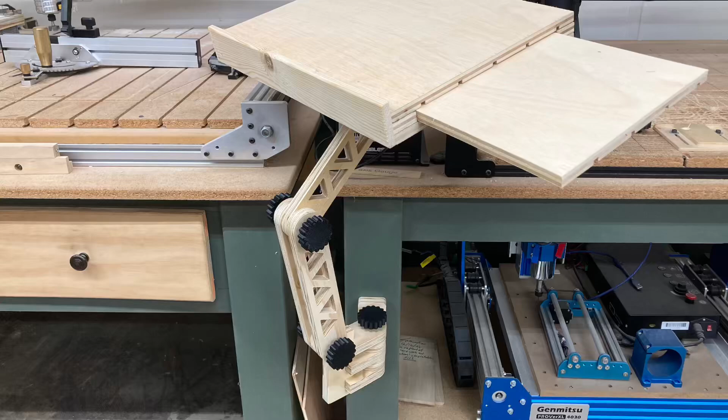A great addition to the shop, cut out using the Easel software on the X-Carve CNC machine. 3D printed all of the different knobs necessary for it, and quick and easy assembly of this computer stand on my CNC table.

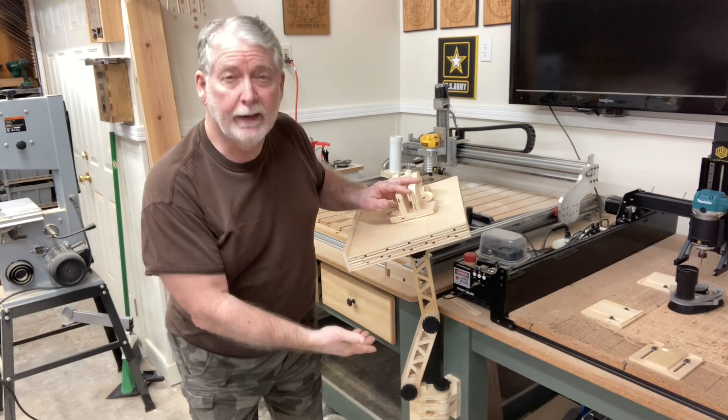Recently I just finished making a video showing exactly how to make this computer stand. I asked you guys to leave a comment if you would like to see the details on how I designed these various components in Easel to make this whole thing work. There were a number of different components that needed to be made, like this one and this one. People were saying yes, they wanted to know exactly how to design something like this in Easel.

There are some basic elements you need to understand. In Easel, there's not really a tape measure you can use to measure out the different sizes, but you can measure the actual size of the object, and you can position it exactly where you want using a coordinate system built into the software. That's what we're going to use to design these different components. Once you understand how that system works, everything else will fall into place.

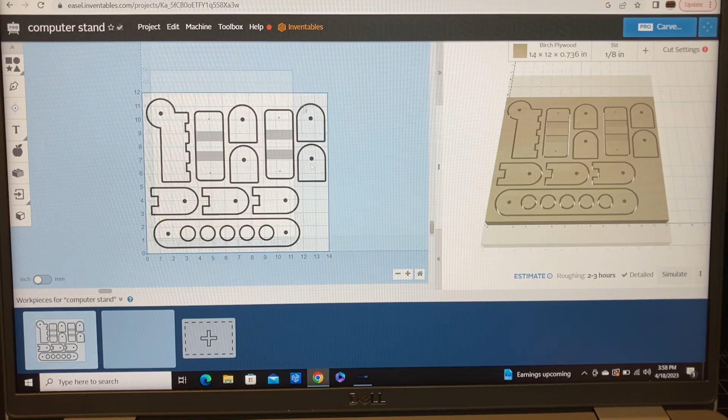What I want to start with is just a very simple basic component right here. We're going to start off with a brand new workpiece, and I'm going to come up to the Shapes menu and bring in this right here. Now this in the original drawing was 2 inches by 4 inches, and I've got a couple of ways I can do this. I can come over here, because currently this is at 2 inches by 2 inches.

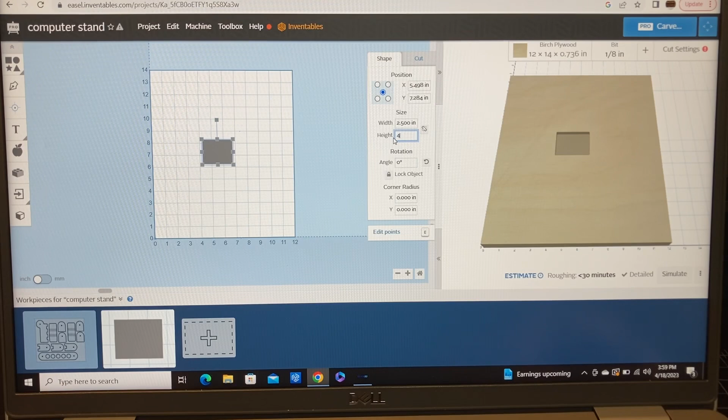I want to change this. I want to beef up this project a little bit, and I want to make it 2.5 inches wide, and make it 4 inches long. And there is the actual square.

Now the next thing I want to do is bring in a circle. So we'll do the same thing - open up the Shapes menu and bring in that circle. Now because I had set this at 2.5 inches, I want to set this circle at the same size. I'm going to come over here and lock this so that the diameter of this circle will remain the same. So now I have a circle that is 2.5 inches.

Now here is the important part. I want to be able to take this and position it exactly on top of this, where it's not hanging over to one side or the other. The easiest way to do that is to actually use the grid system.

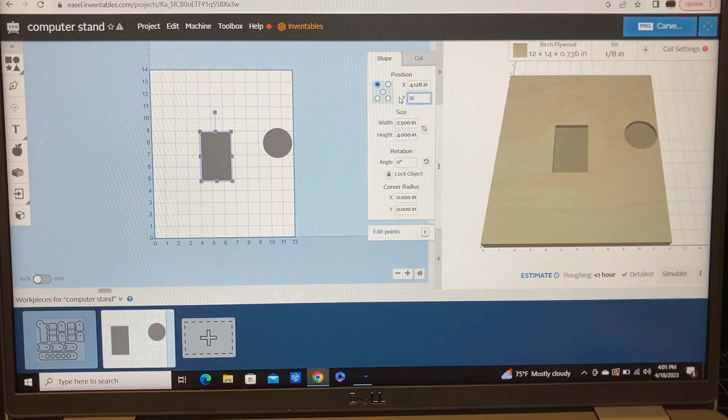To use this grid system, I'm going to highlight this to begin with, and right here on the 9-inch line, I want to put this right on the 9-inch line. You can see right now it's at 8.887 - I'm going to switch that and put it at 9.0. Now as far as this circle, I'm going to do the same exact thing, but in this case it's going to be using the center.

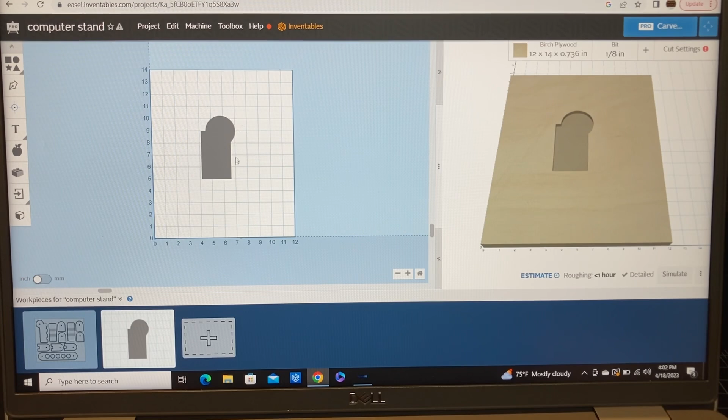If I use the center and put this on the y-axis at 9.0, it will drop down on the y-axis, exactly on that halfway point, but not on the left and right position. Now that I have this right at 9 inches, I can click on both components and move this over with the alignment tool, and that aligns it perfectly in line.

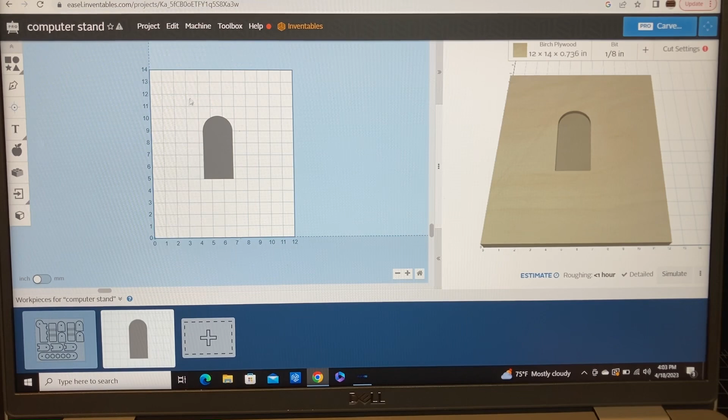Now that I have these completely joined together, let's combine them into one item. By clicking this right there, now this is one component. Click on this now and I can move it anywhere I want, and it will be as one item.

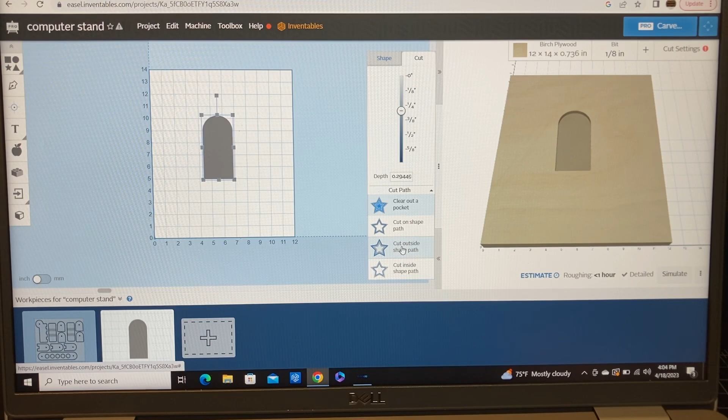Now the next step is to also put this where it's cutting on the outside. So by selecting the cut menu, come down to the cut path, and I can see the different options, and I want this to cut on the outside. I want to use this coordinate system again to my advantage.

So I want to come back to the shape menu and position this now on the x-axis. I'm going to put this, let's say, at the 6-inch mark on the x-axis, and all that does is slide it over. It's still centered on this point at my 9 inches.

We're going to select my circle, take this right up here, lock this, and put this at 0.315. There's my circle, and I want to position this now where? I want to position it directly on the 6 for my x-axis, and exactly on the 9-inch mark on the y-axis.

Now that component is finished. I can zoom in, and you can see that hole is going to be directly into that centered point, exactly where it needs to be. It's all one continuous piece.

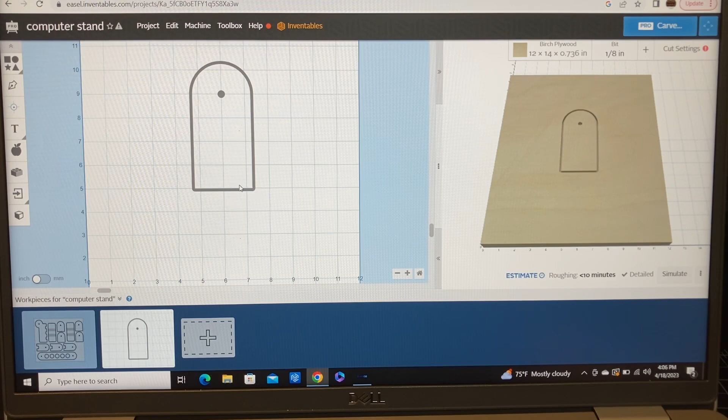If I want to set this up now to be able to cut all the way through, I'm going to highlight both of these, go over to the cut settings, and I'll be able to change this and bring it all the way down to cut full depth.

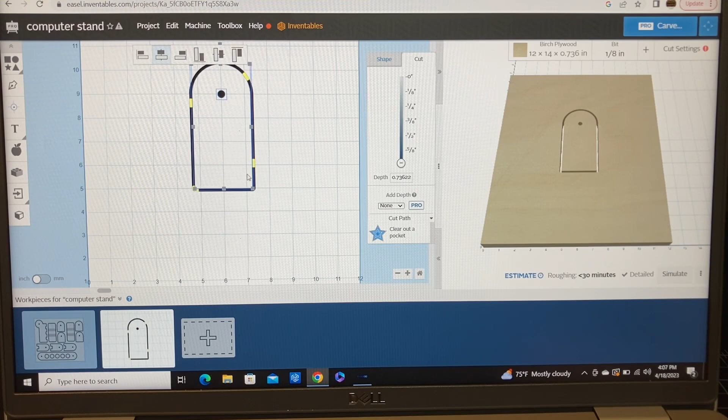Now you need to decide if you want to use the tabs or not. If you want to use the tabs, you can always move these tabs, like this one right here in the corner. I certainly would not want that in the corner, so we could move that over. You could bring this tab over by just getting it right there on that point, holding down the left mouse key, bringing it down. Same thing, hold down the mouse key, you can slide it up to where you want.

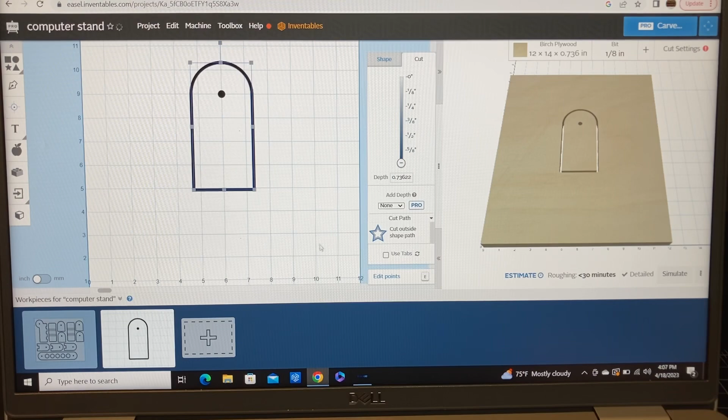Now, as many of you know, I typically do not use the tabs. So in that case, I would come right over here to this section where it says Use Tabs, and I would unclick that, and the tabs would be gone. You see what the finished product is going to look like over here. Now, that's the basics on how to put together a very basic shape.

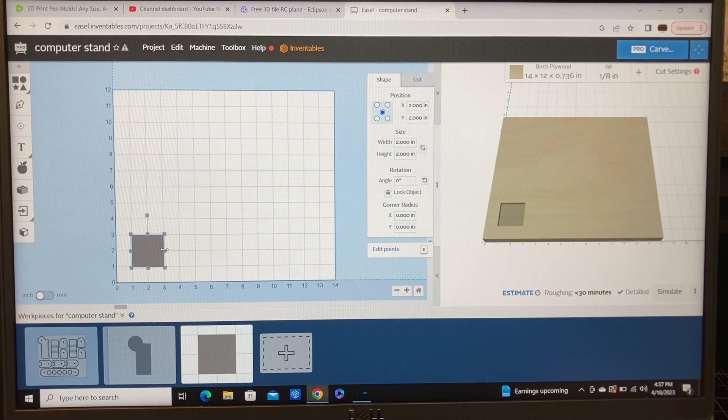With this knowledge now, I want to be able to make the arm for this. So we're coming back up to the shape menu, and we'll select the square, and we can just drag this out. Now, how big does this need to be? Well, in the original design, this was actually 7 inches, so we're going to start with that. We'll make this 7 inches, and we're going to increase this to 2.5 inches.

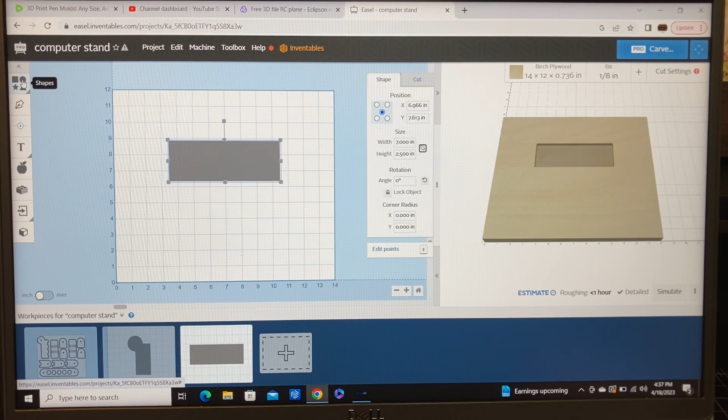Now, at this point, it's time to put the circles on the end of this. So let's grab the shapes menu, bring the circle in. We'll change the circle by locking this, making this 2.5 inches.

So we have that component, and we need to be able to duplicate it. I could just bring in another one, or I can hit Control C and Control V, and that will give me my second one. So there's the basic components that I need to make my arm.

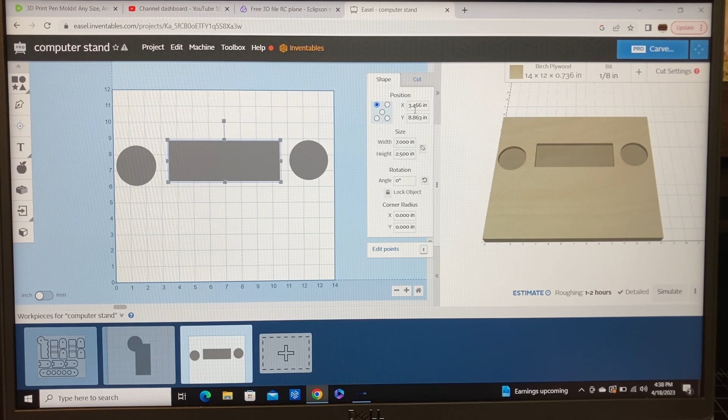Let's move this over and put this on this side, closest to the 3 on the x-axis. Now that I have this on the x-axis at the 3, let's take my circle and do the same thing. I'll center this using the center of my point, and put this on the x-axis at the 3 inches. And there it is.

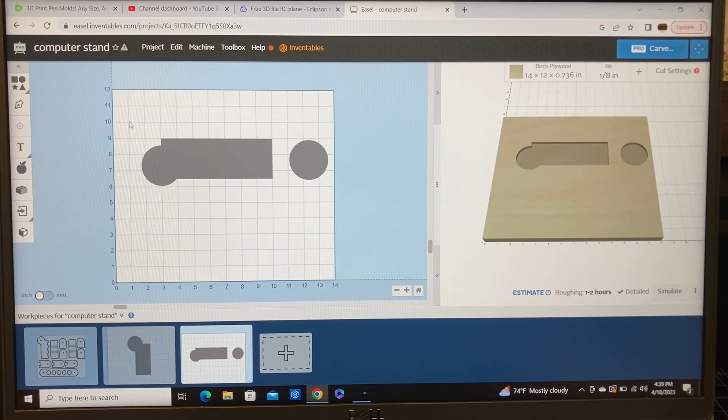Now I'm going to highlight both of these and come up to the alignment tool, and that takes care of it. Now let's do the exact same thing on the other end. So that is the component that I need.

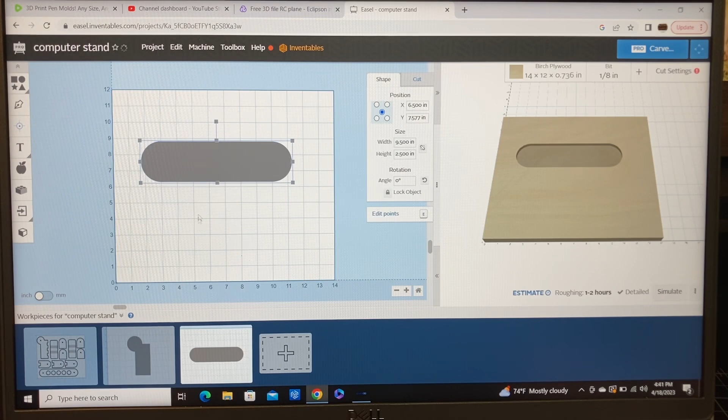At this point, let's go ahead and combine it. Edit menu, combine, there we go. We're going to cut it out on the outside, and we'll select that, and there is our component.

Next, we want to put in the 2 holes on each end, and those holes were 0.315. So back to the shapes menu, select a circle, and change the size. Remember, this was 0.315, for the 5/16 inch bolt. Your bolt size may vary, so keep that in mind if you need to adjust these sizes. But for my purposes, 0.315 is perfect, and I can slide this into position. Using this coordinate system, I can position this very precisely exactly where it needs to be.

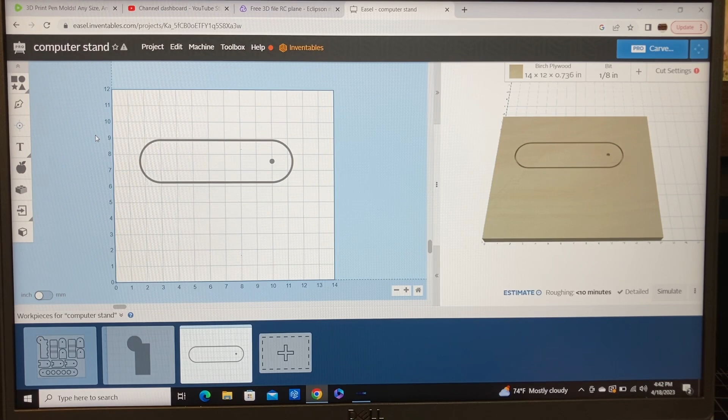I'll repeat the same exact process for the hole at the other end of this computer arm. This completes the computer arm, so this component is done. I can highlight everything and slide it right down to the bottom.

The next part is up to you. If you want to put circles or triangles in the center of this arm, you can certainly do that using the exact same process that we have shown so far in this video.

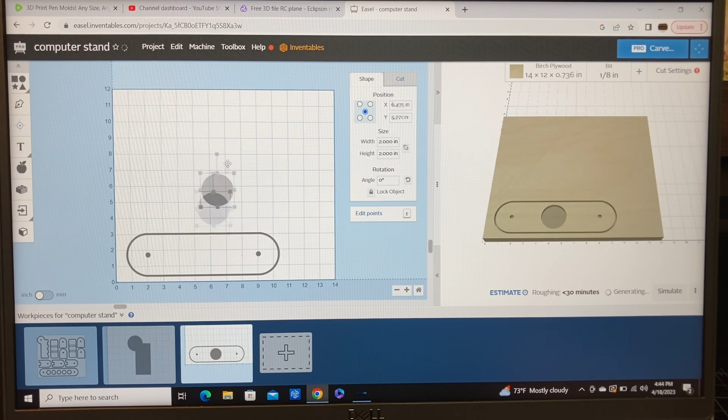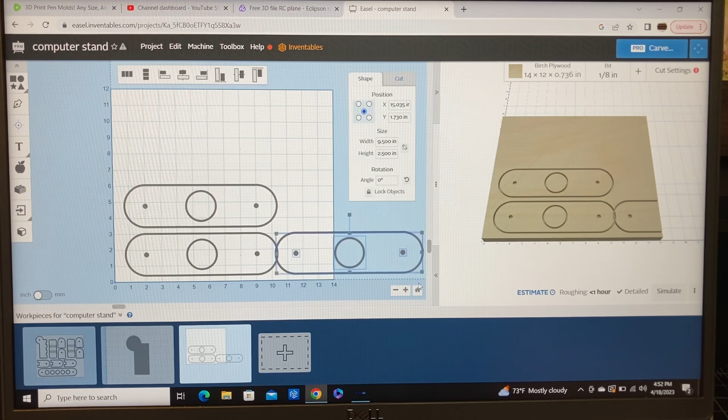You'll need at least 3 computer arms to be able to make this computer stand. At this point, I'm going to highlight it and use Control-C and Control-V to duplicate this. And of course, I'll need to do this one more time, so I hit Control-V once more. From here, I'll highlight it and slide it over, aligning it where I want to place it on my project board. I'll do the same thing with this third piece, highlight it, and move it into position as well.

I want to give you some bonus information. I decided to make this arm a little bit larger, and by highlighting this, I can slide this to the right. It does not affect anything else to the left; it only moves it to the right in that direction. This portion is exactly the same.

The only thing that needs to move is the hole. I need to position it back over in the same position as it was originally, and the center circle would need to be placed again in the center. But using the exact same process as before, using the coordinate system, this becomes a very simple process because we're only moving this on the x-axis. The y-axis is already fixed and did not change.

I hope that you're beginning to see that you can very effectively use this coordinate system to make very accurate measurements and placement of the various items to create these components.

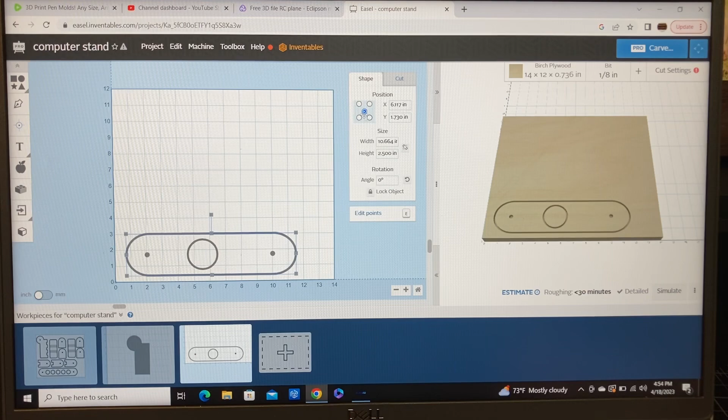To name this workpiece, I can select it in the top right hand corner. You'll have this little drop down menu, select rename. That brings up this window, and you can type in, for example, computer arm, and that will be the new name. Hit rename, and there you go. Now you see computer arm in the bottom left hand corner of the workpiece.

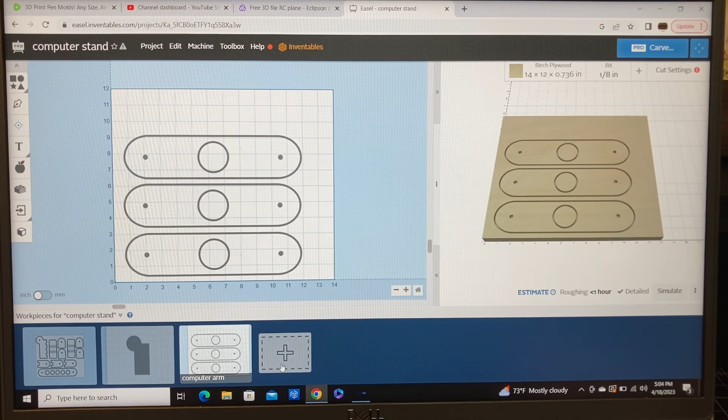Now I want to open up a brand new workpiece, and I want to start working on the base. So it's back to the shapes menu, and let's pull out the square, and we'll put this up into the center so we can work with it. The basic shape of this is 2.5 inches on the width and 5 inches on the height.

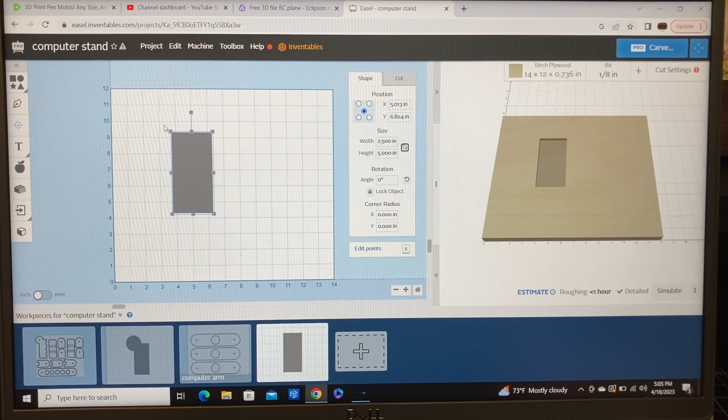I also want to show you how to eliminate the sharp edges on these corners by using the corner radius. I can just highlight one, put in 0.25 of an inch, and hit enter, and that rounds off the edges on all 4 of the corners.

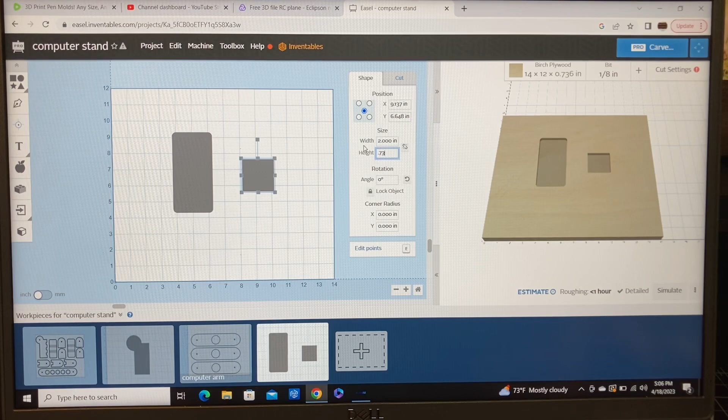Now I want to add the 2 slots. These are the registration marks for the plywood to fit into, giving the correct distance between the 2 pieces of plywood. My plywood is 0.736 of an inch, and I want to increase that by about 0.040 to give a little tolerance. So I'll enter in 0.776. You'll need to verify the thickness of your plywood and enter the correct amount.

I'm also going to enter the depth of the cut by selecting the cut menu, and I'll set this either with the slide bar or key in the amount. I'm going to put in 0.15 of an inch for the depth, and that will give me a nice slot for the plywood to fit into.

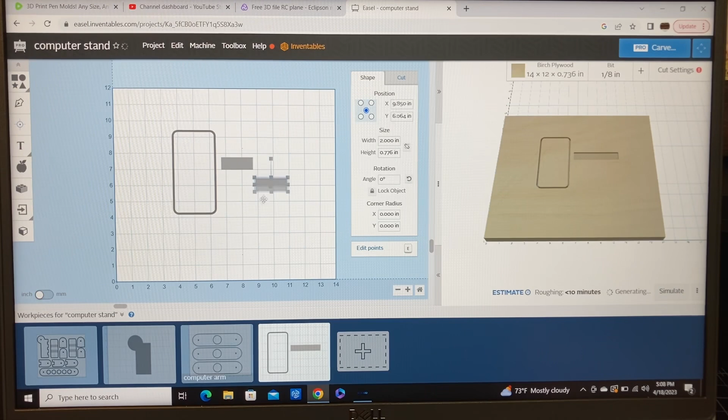Now with this base, let's go ahead and change this where it's cutting on the outside. So there's that shape, and we know we're going to need 2 of these. They're going to need to be one right there. We'll hit Control-C and Control-V, and we'll have another one. We know it's going to be right here.

This bracket will need to be able to sit inside of there, and we need to have that space for that plywood right through here. So where is it actually going to be? Well, the simplest way is to use the grid. I want to set this grid up where I'm working with the center points to begin with and work outward. So this is centered on the y-axis.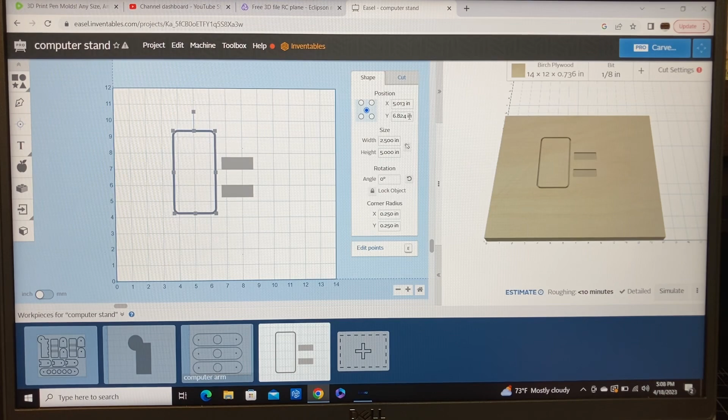We'll just make this at 7 inches. So that's going to be the center point. I'm not worried about the x-axis. I want this also cutting all the way through, so that will cut all the way down. I'm going to have no tabs in there. Now over here on the preview window, you can see where it's cutting all the way through.

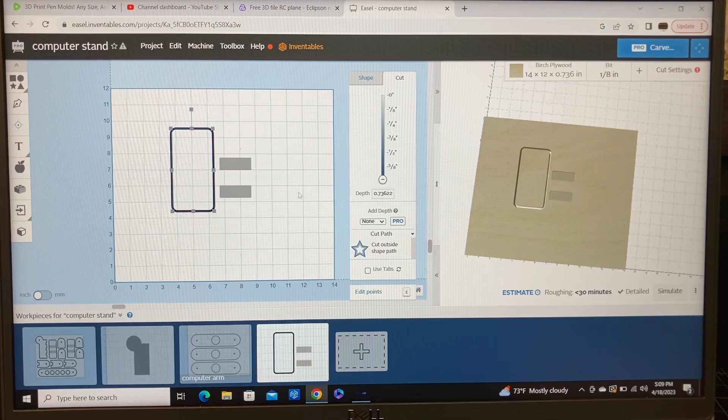Now for these, if I just put these in here, that's not going to fit. That's going to need to be extended a little bit to fit into that space. But look what happens when I do that - you can see how it's not cutting all the way through.

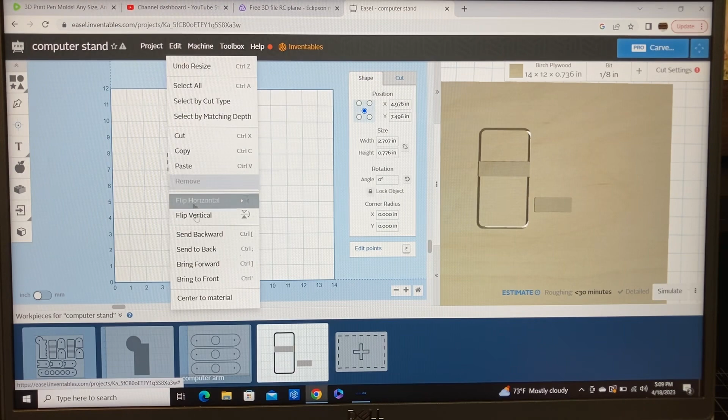Well, there's a simple solution. All I need to do is come up here to the edit menu and select send to the back. And when I send it to the back, you're going to see where that is now going to cut all the way through. Perfect, exactly what you want. Now that takes care of my x-axis. That's exactly where I need to have it, but it does not take into account the y-axis.

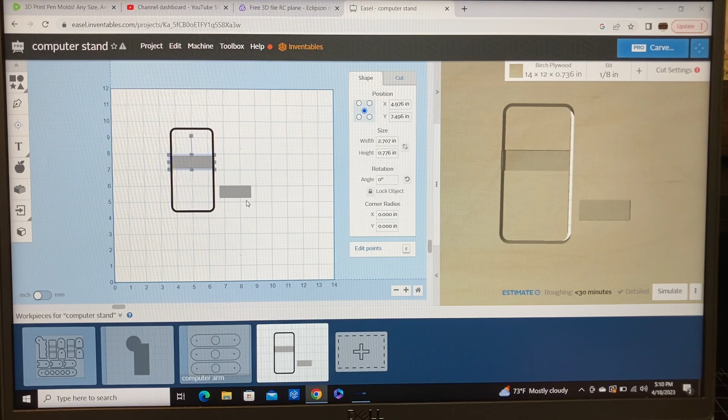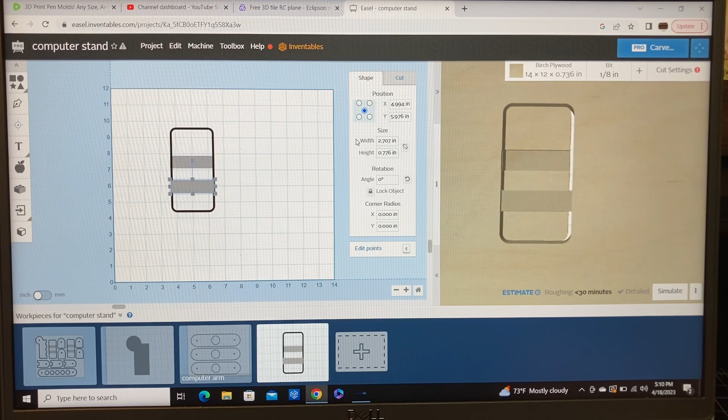The other thing is, this gives me the exact size that I need. I know this was 2.707. Let's make this one 2.707, and that would be fine. We'll slide that over, and we can put that in at exactly the same point. Where's the center point? The center point of this is my 5 inches on the x-axis. You see the same problem that we have over here. All we need to do is highlight it and send it to the back.

Now we need to work on the y-axis. How thick was that plywood with the tolerance built in? Well, it was 0.776. What is half of that? Half of that would be 0.388. Now using the 0.388, that is going to be real important because we know the center point is our 7 inches.

So if you have 7 inches, let's highlight this right there. Let's make this highlighted on the bottom. And this now needs to be at 7.338. That moves it up exactly half of the thickness of the plywood.

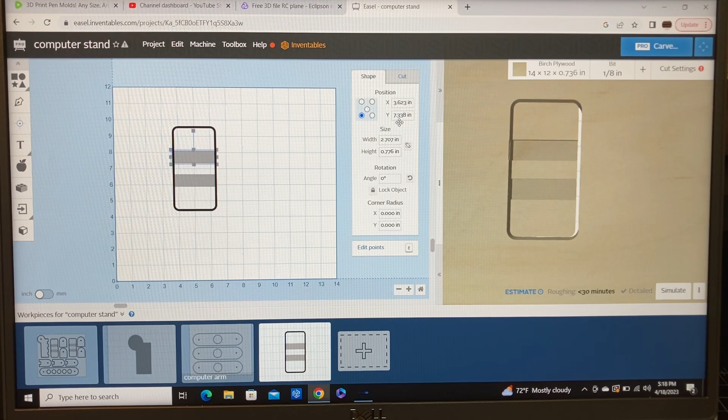Let's get my bottom slot moved. Right now I'm at 7.338, and we're going to subtract 0.776, and that gives me 6.562.

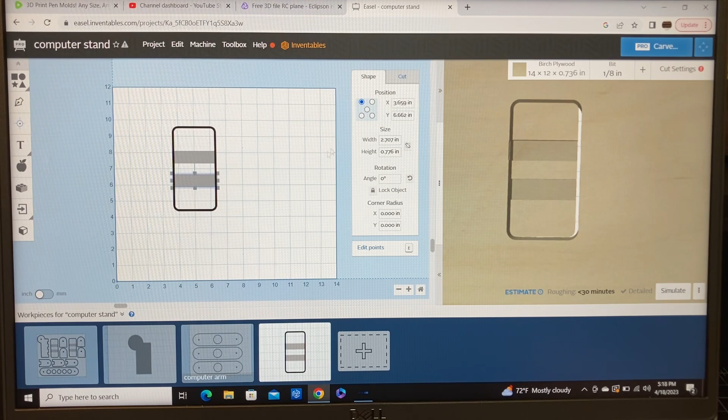So what we need to do is come down to this one and select the top. It doesn't matter which one you select. We need to put this now right at 6.562.

And that will give you the exact spacing that you need, with 4/100ths of an inch in between. So that completes the base, and that will give you exactly what you need.

Now I like to be able to put in just 2 little pilot holes, just as a reference as to where you can screw in this mount. This is strictly optional, you don't need to do that, but what I'm going to do is put them in.

So I'm going to take this circle. Let's make this a little bit bigger than 1/8 of an inch so we know the drill bit is going to do it. We'll make this 0.131 instead of 1/8 of an inch at 0.125. So let's lock this, we'll put this at 0.131.

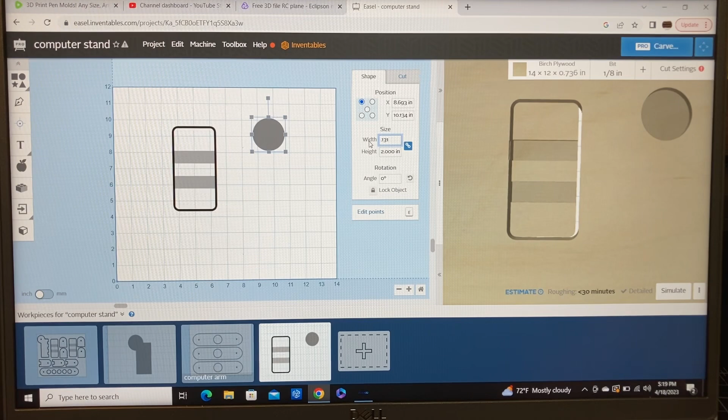Again, do the math, move it over on the x-axis on the 5 and do the subtraction to put it exactly where it needs to be. And of course, you'll need to do the same thing for the pilot hole at the bottom.

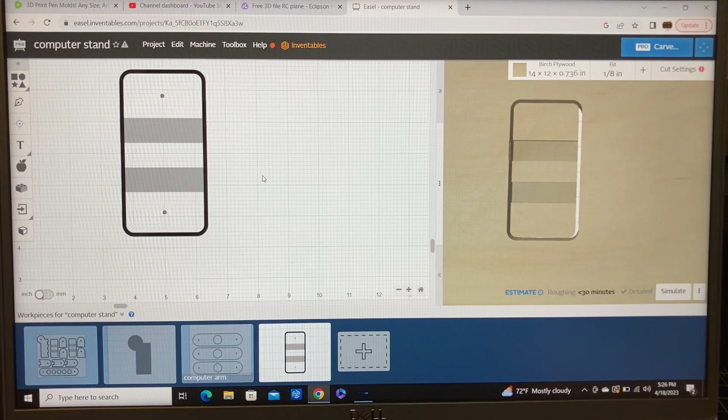Now this actually completes the base, and it's exactly what I need to have, but there's still one problem: the pilot holes are not showing up on the preview. This causes people a lot of different problems, but basically that's saying it's not going to carve out when you run this job, and it's not.

What we need to do is actually change the size of these holes and make them just a little bit larger so that they will show up over on the preview menu.

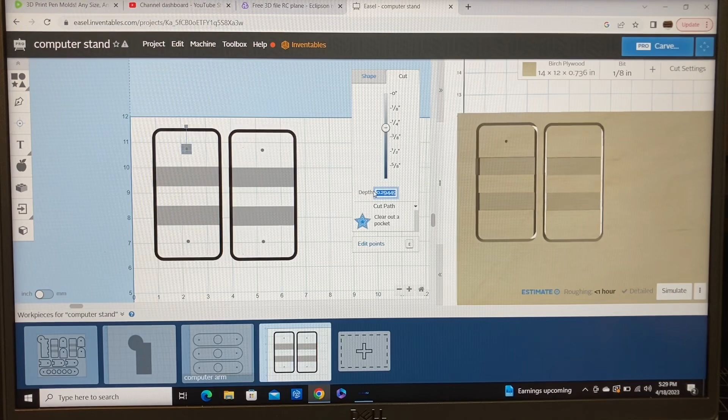With that small change, you now see that pilot hole showing up on the preview menu. I know this has been a huge problem for a lot of people, that they don't see their design showing up in the preview menu, and this by far is the most common reason.

I have the basic component here put together, but we need to put these notches in there. To do that, let's grab another rectangle, bring this up. I want to keep that tolerance at the 40 thousandths, so on the y-axis, as far as my height, it needs to be 0.776. The length of this really doesn't matter at this point on the x-axis.

So I'm going to need 3 of these. I'm going to hit Control C and Control V, another one will go right in here. Control V again, and another one will go into this area.

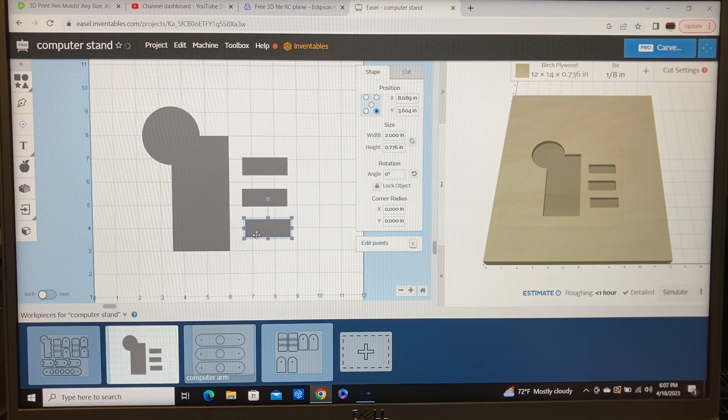Now again, there are things we need to look at. This top portion right here is on the 8, this bottom portion, a line, is on the 3. So what's halfway in between that is my 5.5, and that is going to be the center point of this.

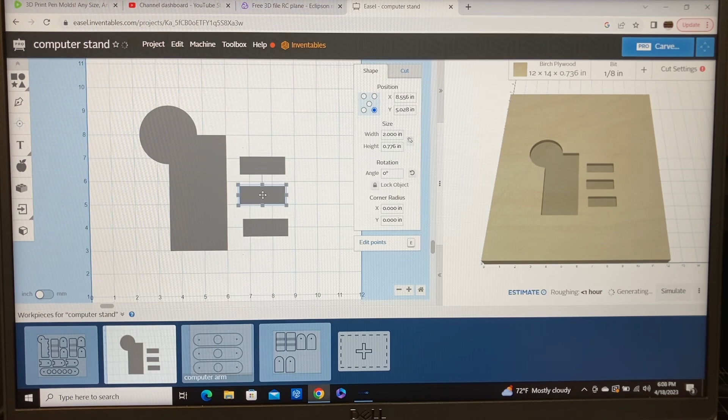So if I take the center point, and let's just assume for a second that I change this to a 0 cut depth, so I'll just keep it light gray at the moment so we can still see it, that's going to be sliding into this point. This one will do the same thing.

We'll just make it light gray. This one will slide into there. And of course, this one, we'll make it light gray at the moment, will be slid down into this point.

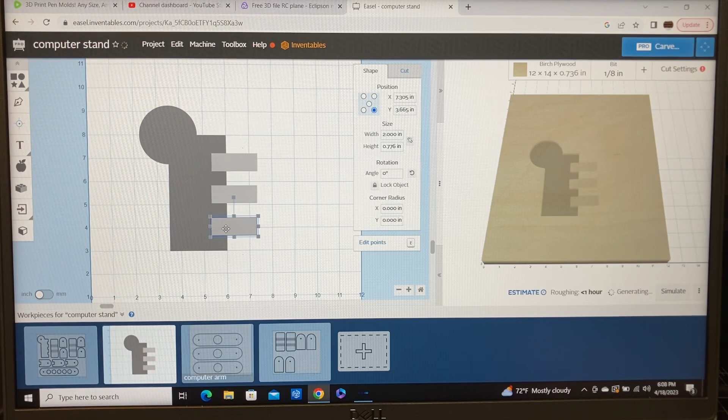Now with that thought in mind, that's the basics. All we need to do now is look at these specific coordinates and be able to position it exactly where we want it. Now the first thing is, we know that 5.5 is going to be the halfway mark, so let's use the center of this one, we'll put it at the 5.5, and that's centered on the y-axis where it needs to be.

But that's not in reference to the depth. I want to have this where it's a 1/2 inch deep. This is on the 6, so let's move this over, and that needs to be at the 5.5.

Whoops, wrong one, so let's just unmove it. We'll move this at 5.5. So we have the first one positioned where it needs to be.

I'm going to move this now to the center point. X-axis is at 6.5, so this one needs to be at 6.5, and this one needs to be at 6.5.

And that takes care of the x-axis. I know this one's centered correctly. What do I need to do now? I need the space between here and the space between here to be the...

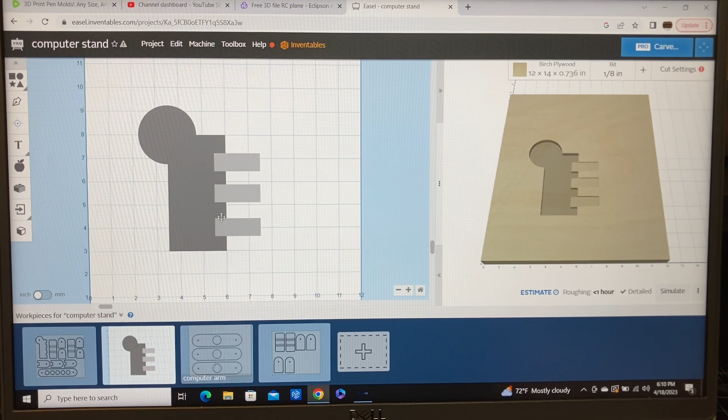0.776. It's done exactly the same way as we did before. I want to start with this one. I'm going to highlight this right here. I know that this line on the y-axis is 5.888. So if this is at 5.888, I need the bottom of this one to be, with this gap in between, 6.664.

So we'll put that right here, and we'll put this at 6.664. And that positions it exactly where we need to be. It doesn't get much easier than this. Now let's do the same thing with this one again.

We're going to look at the bottom of this, and the bottom of this number is going to be 5.112. And we need to be able to subtract the 0.776. And that means that the top of this is going to be at 4.336. So let's highlight it, let's make it on the top. That's the reference point. And on the y-axis, 4.336.

I need to take all 3 of these now and make them to a 0 cut depth, so there's nothing there at all. Highlight everything and combine it. And by combining that, I now have one component that will move around with those notches exactly the way that I want it.

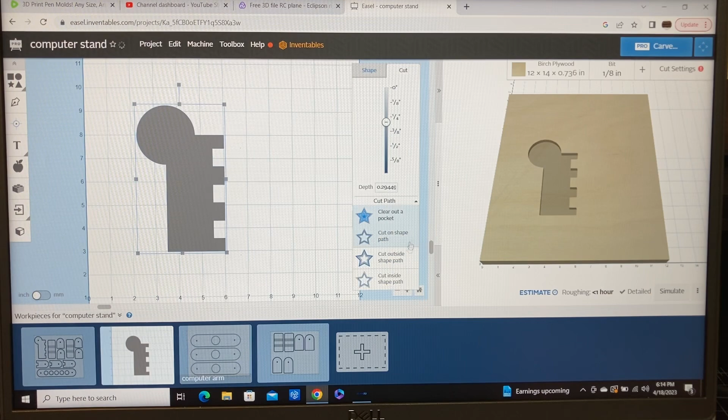So now then, I know that this is going to be the 8, and I know this is 3.5. Let's go ahead and set this up now where it cuts on the outside. So we highlight this component on the cut menu, come down to cut path, click on the cut outside, and while we're here, let's make the depth of cut to its full depth, cutting all the way through the material. As far as the tabs, we'll uncheck this.

Tabs are gone, and now we can concentrate on the hole in the center. With our hole now sized correctly, all we need to do is position it where it needs to be. I've highlighted the center point of the position, and now I can just type in on the X coordinates the 3.5, and on the Y coordinates I can punch in the 8.0, and that gets it centered.

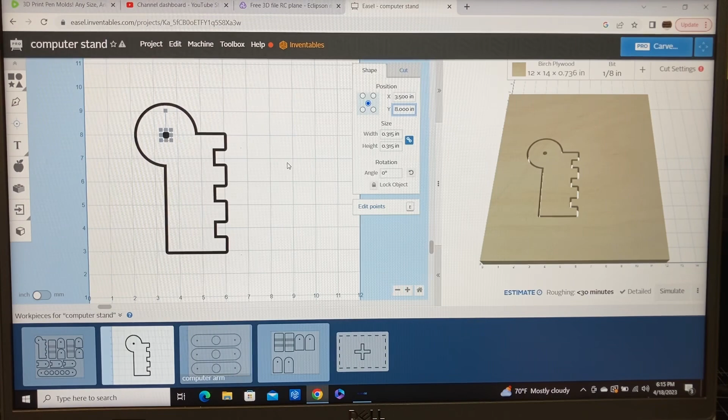The last item we need to make is the component that will slide into these notches. And we already have the basic right here. The only thing I need to be able to do is put the slot into this right here. And we're going to do it exactly the same way. And I can rotate this 90 degrees.

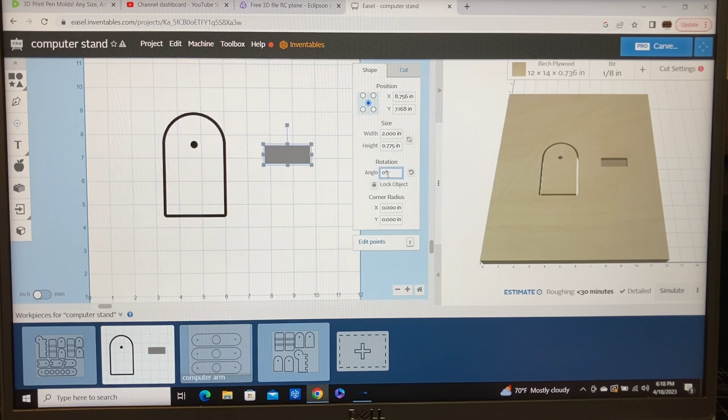I haven't shown this before. We're going to rotate this 90 degrees. And we need to put this in the center. So we're going to do the same thing as what we did before. We're going to move this over to a center point, and we can just put this on the x-axis at 5. See how we can just slide that over, but on the x-axis, make it real simple at 5.

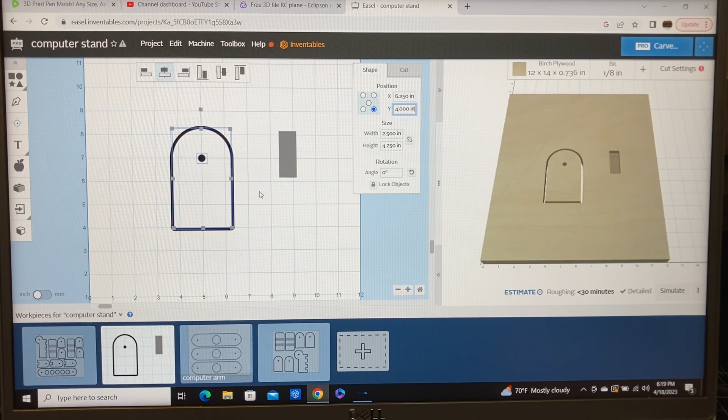And we'll put this now down at the bottom, and we'll put this on the 4. There we go. Now we know exactly where that is. We can bring this down to here, and what are we going to do? We're going to center it to begin with. We'll put this at the 5. So that takes care of the center, and now we need to move this up.

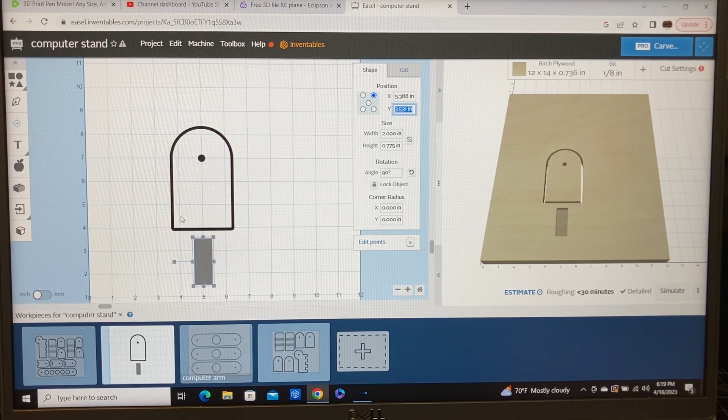We need to move up to this top corner, actually on the y-axis. We need to have this a half inch in, so that's going to be at 4.5. So I hope you can see it. This is starting to get pretty easy to be able to do.

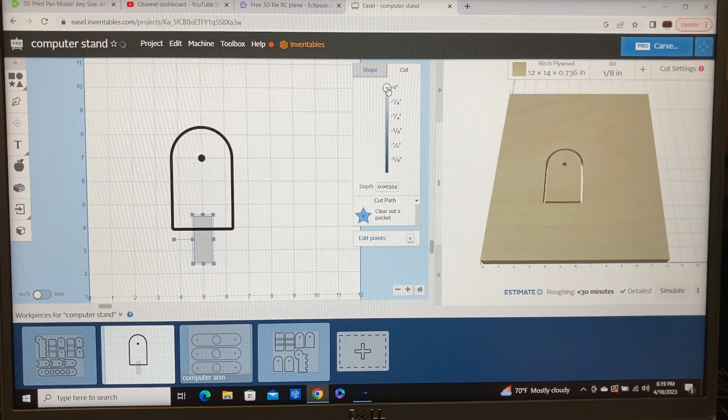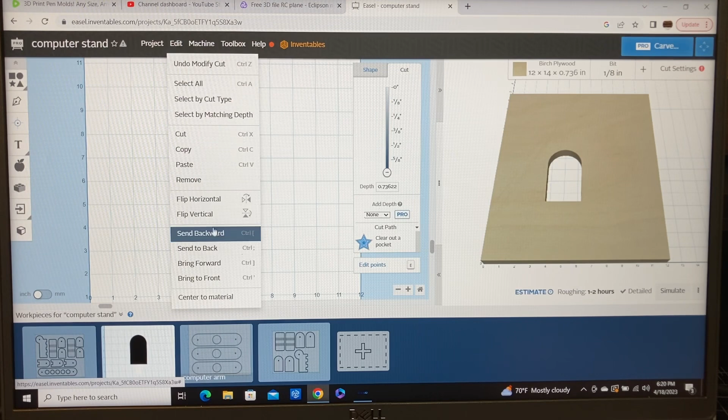And at this point, that's where the notch is going to be. We're going to change this. We're going to reduce this all the way down to the 0 so you can't see it. I'm going to make this as far as cut on the pocket. Now when I change this, you don't see that notch, so we need to take this item and let's move it to the back. There we go. There's our notch. Now we can take this whole thing and combine it.

And we have our notch there. The component is now combined together and our notch is in place. The only thing that we lost was the hole that was in the center, and that's okay. We'll put that back in later.

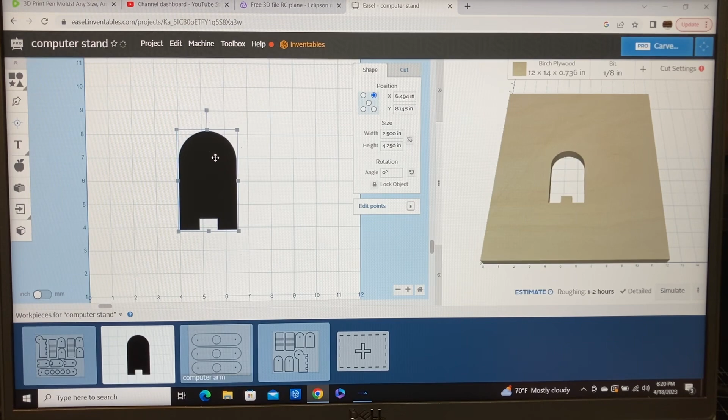Right now we need this component to be able to put the dog bones in. To do that, I need to come over to this app. You'll get the drop-down menu, scroll down, find the dog bone generator, and highlight it. That creates the dog bones that we need. The bit size is the 1/8 inch, so that's all correct. We import that into our design screen and, of course, eliminate the tabs.

Now this is very important. I want to zoom in real close. This little blue line shows the actual tool path. This is now cutting, after we brought this in from the app, cutting on the tool path rather than cutting on the outside. You must change this. You put this now back on the outside and this will cut properly.

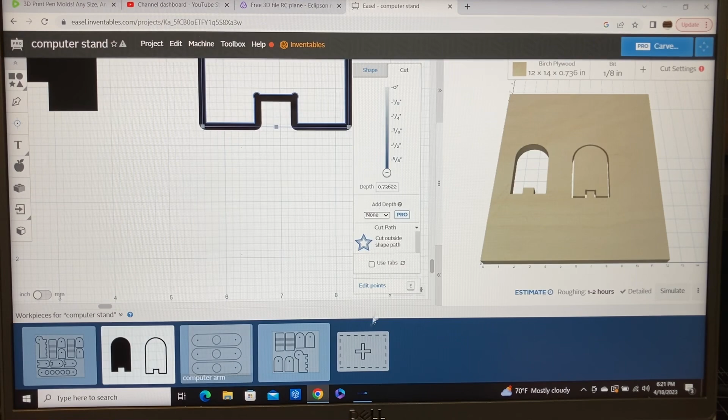This is very important when you use the app. Don't forget this step. If you do, the piece will be cut out too big and it will not work, and you'll have to recut it.

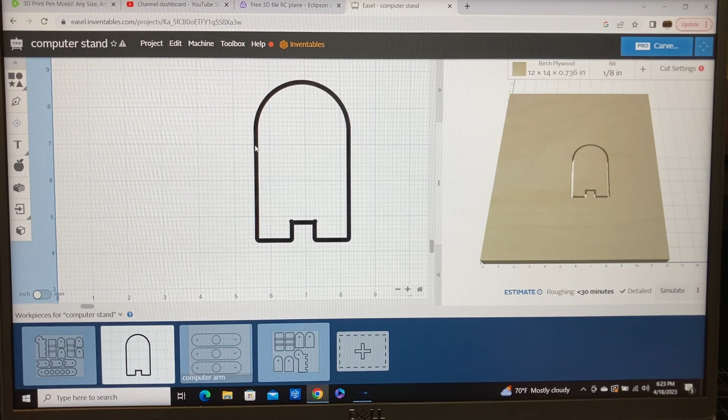Now we can eliminate the original design. We no longer need it because we have the component with the dog bones. The only thing we need to do now is add the hole right here in this center. Using the exact same step, I added the hole back into this component, and this completes this component.

All that's left now is being able to highlight this and put it on the correct workpiece so that we can get it prepared to cut out. After just a moment, I changed the size of the project board to where it's 11 inches by 19, and that fits in there quite nicely.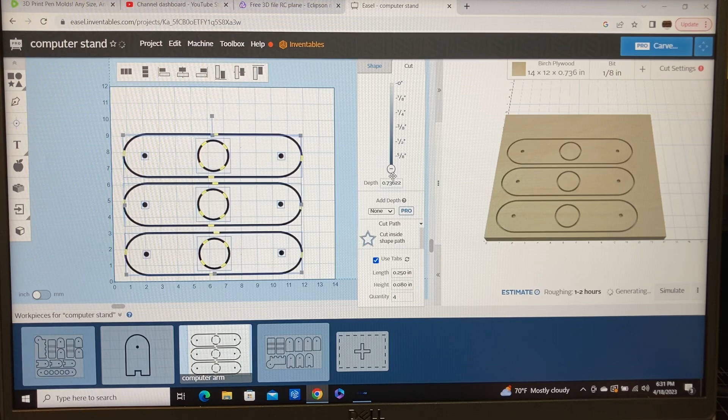I'm going to switch back over to this one because all of this needs to be where it'll cut all the way through as well. No tabs, and that takes care of it.

So this project now is finished. We'll click this and we'll rename this to the computer stand parts. There we go, that's renamed. So we have the component arm, or computer arm down here, and the computer stand parts right there.

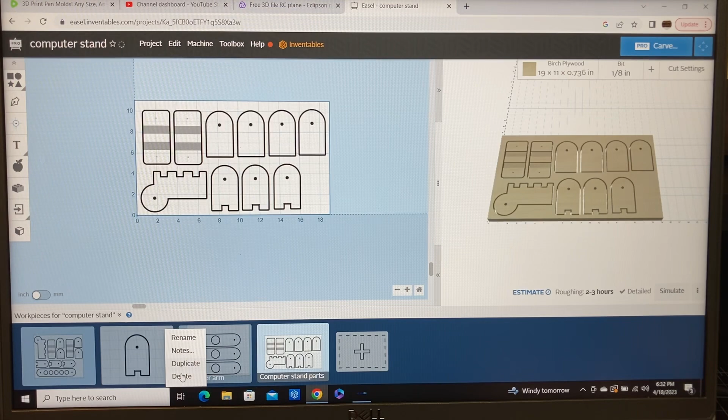This one we don't need anymore, so I'll take this and delete it. That will permanently delete it. This original one we no longer need as well, so this first one we can delete as well. And that takes care of it, so I no longer need that. So this is all the computer stand parts.

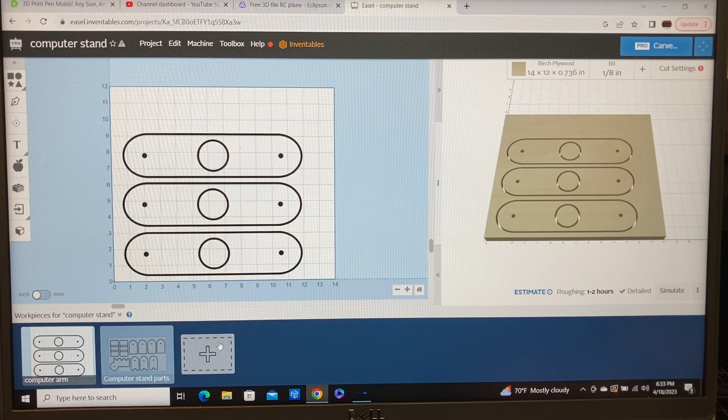The only thing that's left now is to be able to make the top itself. And I had done this on the table saw, but I'm going to show you exactly how to cut this out on the CNC machine as well.

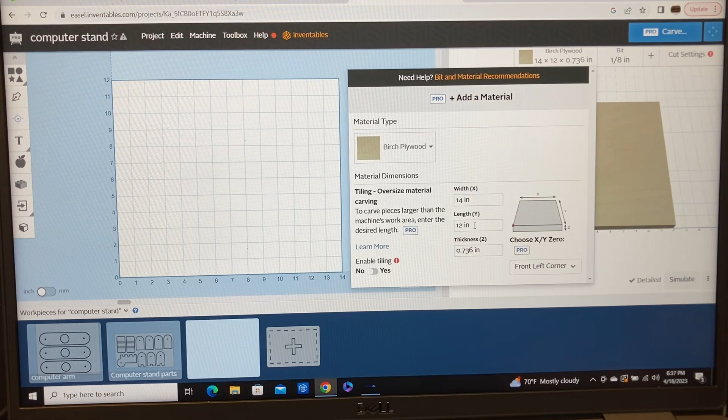For the next piece, the computer stand top itself, you can have a lot of fun with this. Mine was 12 by 16, but I'm going to make this a larger piece of wood. So we're going to start out with 25 inches, and we're going to make this about 18 inches. We'll make it a little bit big. And I had this at a 0.5 inch thick material.

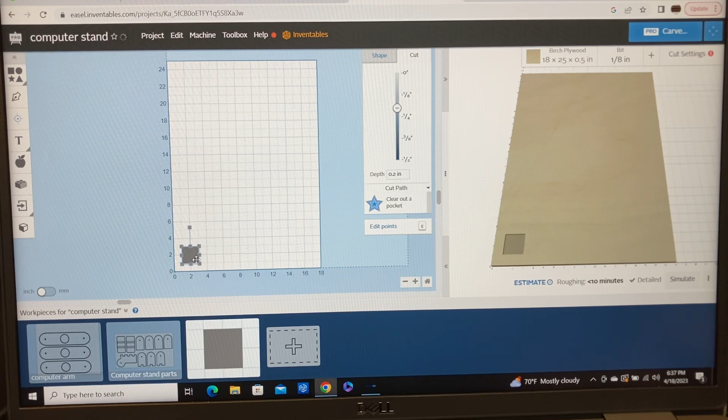So there you go. I want to get a rectangle here, and I want to get two pieces in here. The size of this will be 12 by 16, and I'll do the same thing, hit Control C and Control V, and that will be my second piece. That'll fit right in here. Now, like I said, you can do this on a table saw, a circular saw, even a jigsaw.

You don't have to do this on the CNC machine, but this will work just fine. And of course, we're going to need to change this and cut it on the outside. So we'll change this outside right there. We'll cut this one on the outside.

We'll make sure these are cut all the way through. You can use tabs or not, so I'll just remove the tabs.

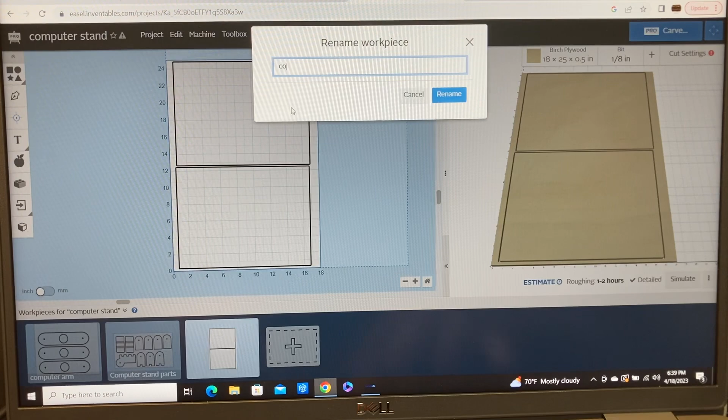On the other one, we'll do the same thing and take the tabs out. The last step, I like to rename this, so we'll select computer top and key that in. Hit rename, and that will complete this workpiece.

If you want to give yourself a little bit of extra room, probably wouldn't be a bad idea, but this is going to fit on there just fine and be able to cut out.

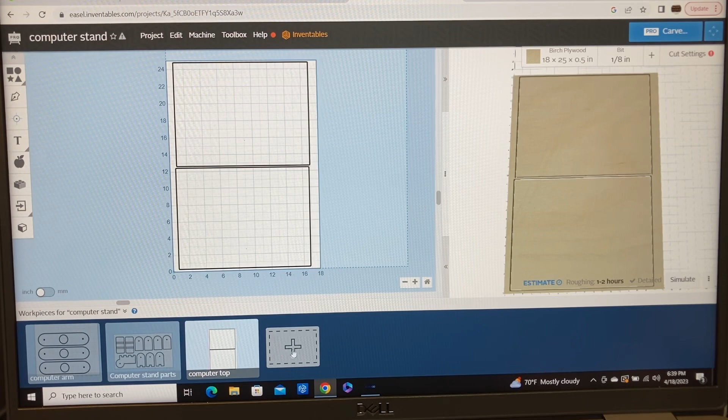We need one more workpiece now for the mouse pad itself and the component that will allow the mouse pad to slide in and out and create the stop.

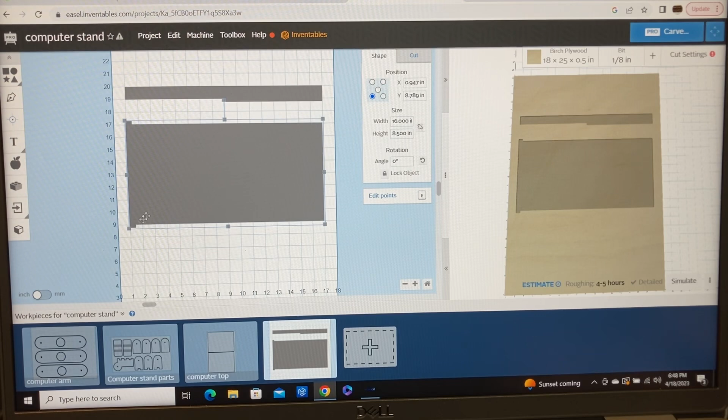Once you connect the tab on the left side, just combine it, and now you have one component—that is your mouse pad. The guide rail at the top will need to duplicate and have one at the bottom, but you can see how this mechanism is going to work, creating the necessary stop and allowing it to slide in and out.

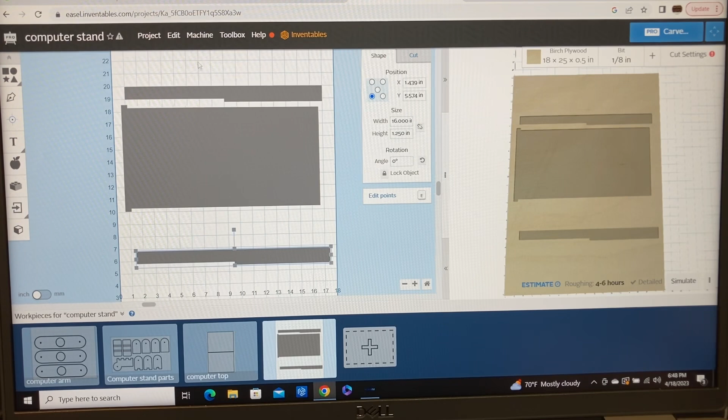I used the copy feature, copied the guide rail, brought it back down to the bottom, and then another new feature I haven't shown you—back to the edit menu—I want to flip this piece on the vertical. So click to edit, come down to flip vertical, you can see it right there, and that will reverse it and make it exactly the way it needs to be.

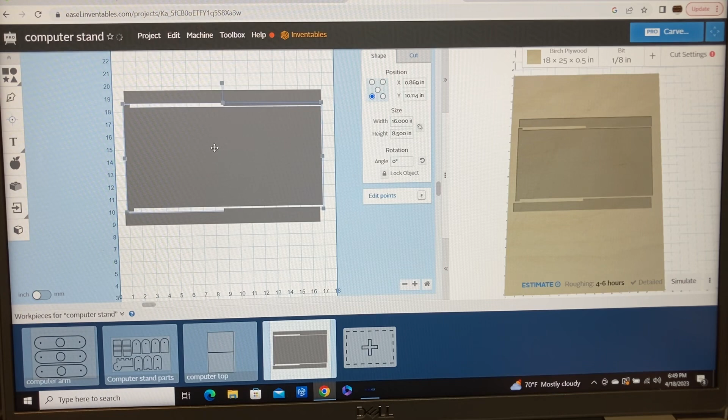Now, is this important from the standpoint of cutting this out? No, it's not. But to test this mechanism and make sure it's all going to fit and work correctly, this is an important part. The last question you may ask is, do you need dog bones for this? No, you really don't. If you want to put dog bones in one of the components, you certainly can, but it's not necessary.

The last step of this process is to make sure this mechanism is going to work. To do that, I overlaid this on top of the computer stand, zoomed in real close, and looked at the actual tool path to see where this is going to cut and how much clearance there is between the guide rail and the mouse pad. You can see there's a little bit of gap there, and that's what I'm looking for.

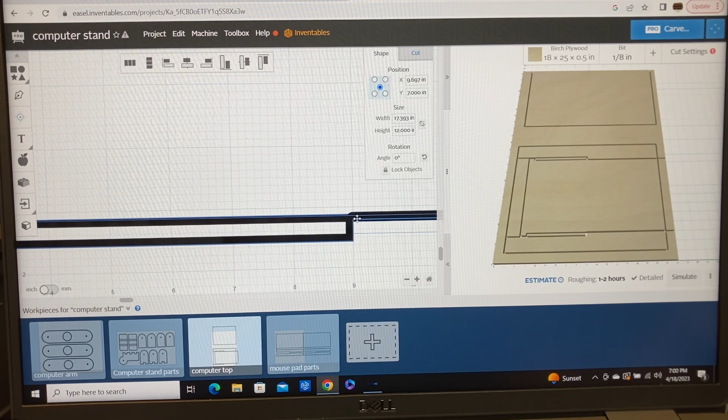This is an important step because if you need to adjust the guide rails, now is the time to do it so that they'll fit properly on top of the computer top itself. In addition, don't forget you need a little bit of a spacer underneath the guide rail to allow room for this mouse pad to slip in and out.

In the video where I showed how to make this, I used thin strips of Formica as my spacer. You need some type of spacer—it doesn't have to be a Formica strip.

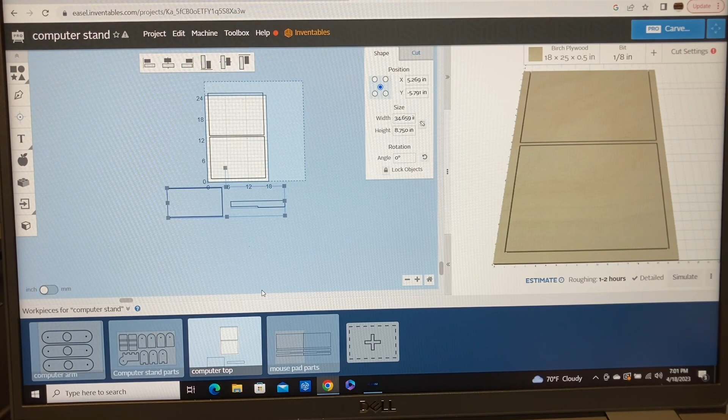All that's left is to take my mouse pad components, copy, and bring it over into my new workpiece for my mouse pad. Arrange them so they'll fit into the project size for the material I'm using to cut this out. And then, of course, I'll rename this to the mouse pad workpiece.

This concludes this video. This was a very detailed video showing exactly how the basic principles of Easel work, and with this knowledge, you'll be able to design pretty much anything you want to.

Don't forget, this computer stand is going to be on the Inventables project page should you want to download this and carve it out. Strictly up to you. If you want to take the knowledge you've learned from this video and design your own, or design whatever you want to, you have the foundation and the basic information now to be able to do so.